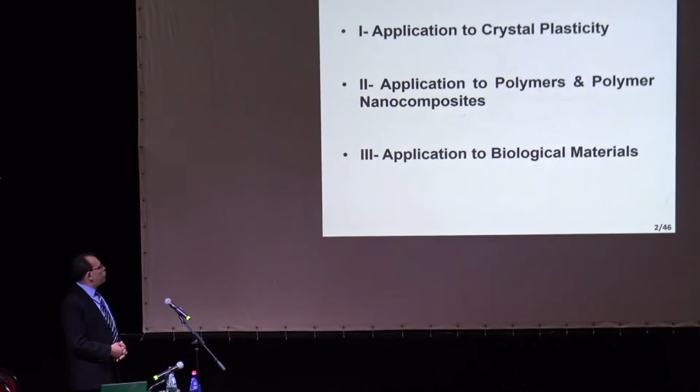As the title says, I will talk about micromechanics of materials as well as multiscale modeling and homogenization, and of course I will focus on microstructural effects, existing microstructure and the evolution of the microstructure, and how that affects the properties. The applications I will focus on today: one is on crystal plasticity, the second is application to polymers and polymer nanocomposites, and the last one, but not least, the application to biological materials in terms of homogenization and prediction of the effective properties.

So let me start with the crystal plasticity part, and I will go through a very brief introduction. Then I will talk about the viscoplastic formulation of deformation of single crystals, then polycrystal, and how we average to get the macroscopic response, but also to get the evolution of the microstructure. And I will talk about the self-consistent modeling.

I will talk about the self-consistent-like model, which is a more pragmatic way of homogenizing, but it gives us great results too. It is simpler than the self-consistent, but I will show you that we predict nice results from that model. And I will also compare to the classical upper bound and lower bound estimates.

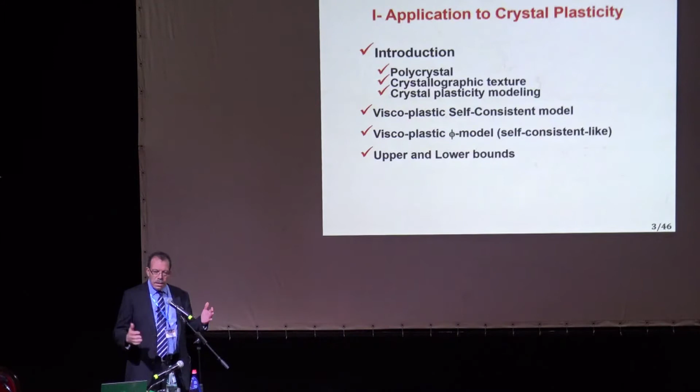So the motivation for crystal plasticity is the fact that when you have deformation processes like in metal forming, you may have initially an isotropic material, but at the end you will have anisotropy that is due to morphology change, the shape of the grains and their orientation, also some behavior due to grain boundaries, but mainly what I will focus on is the crystallographic orientation.

That we call texture, or preferential orientations of crystals. As shown in this schematic here, you may have an initially random distribution of crystallographic orientations, but after a process like rolling or forging, you will have a highly oriented material, with different orientational components that we call texture components or preferential orientation components.

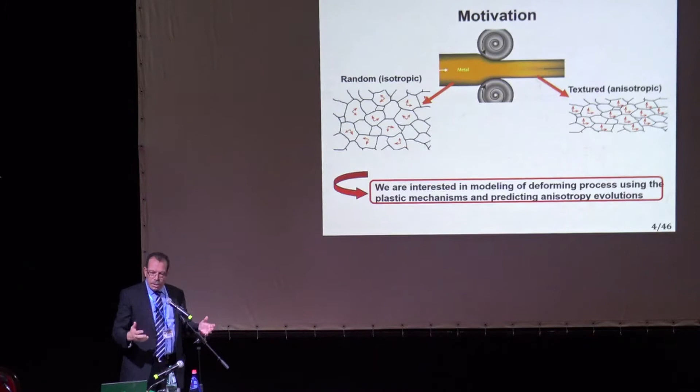So plasticity happens, or occurs, by crystallographic slip on specific crystallographic planes and crystallographic directions depending on the crystalline structure that you have. It may happen also by twinning. These are the main microscopic mechanisms that we have to model and account for, and then take this modeling to the macroscopic level.

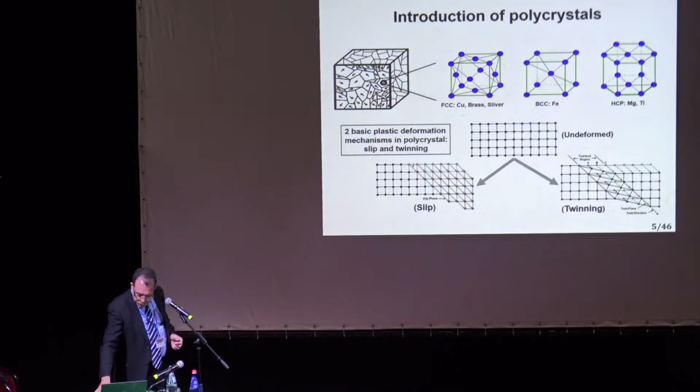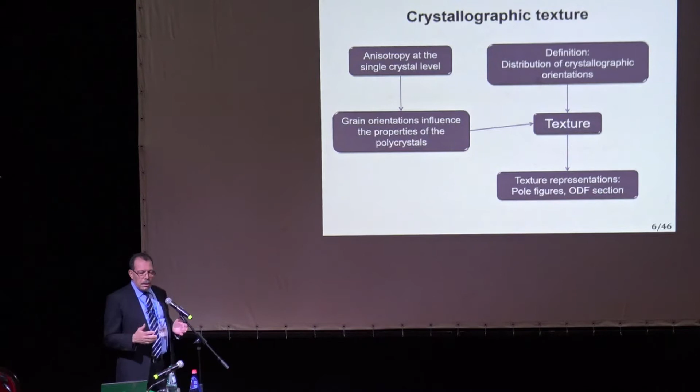Now, when we deal with microstructural evolution, and here is texture or crystallographic orientation, we need to find a way to represent these textures, or this anisotropy. So one of the representations is through the ODF, the orientation distribution function, in which you plot the Euler angles, the three Euler angles, and each crystal fits within a point.

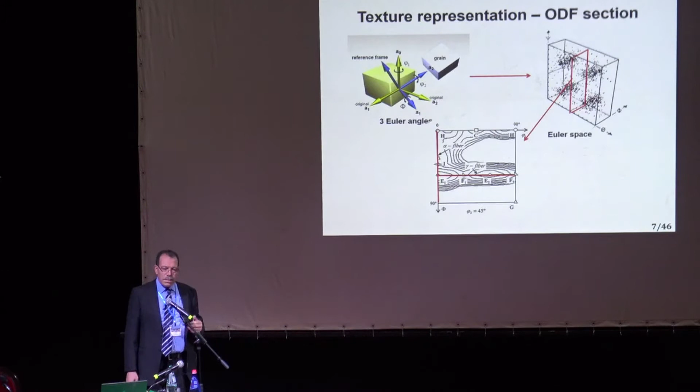But this is a 3D representation, which is difficult to read. However, what we could do is have a 2D slice and cut at a given angle. For example, if we take phi constant, we slice and then plot it in 2D. However, it's not easy to read except for people who know well crystallography or metallurgy.

But the easier way, or one of the easiest ways, is just to use the pole figures. Either direct pole figures, where you take a crystal, plot the normal for a given crystallographic plane, and then project it onto the south pole, and where it intercepts the circle—the intersection with the plane that cuts the sphere into a half—that gives you a point.

If you see on top here, if I have a certain number of crystals, and for example an FCC metal, I plot the 111 planes and the normals to those planes, and if I see something like this in the pole figure, that means I have a random distribution. Here, the macroscopic axes are 1, 2, and 3.

So I know exactly where the crystal sits with respect to macroscopic axis. This is a direct pole figure, and this is a textured material.

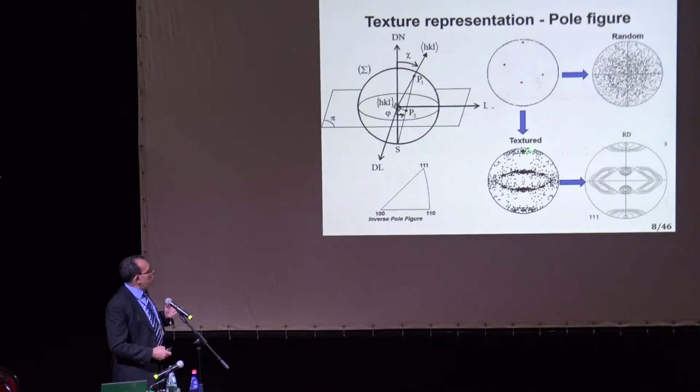This is a rolling texture. As you can see, this is random, this is rolling—you can see concentration of orientations in specific areas. That means we have preferential orientations. For example, this is the rolling direction, this is the transverse direction, and the normal direction is in the center.

So we can say that if this is the 111 pole figure, then the 111 normal planes will have some of them concentrated around the rolling direction, and some in these areas here. So I'm not going into details of this.

The other way of representing is if you have uniaxial loading, like compression or tension, we use what we call inverse pole figure. In fact, we sit in the crystal axis and we see how the macro axes rotate.

So you plot the 100, for FCC metals or FCC materials in general, 110 and 111, and then if you do a tensile test, you may have dots here, and each dot will represent where the tensile axis sits with respect to these three directions.

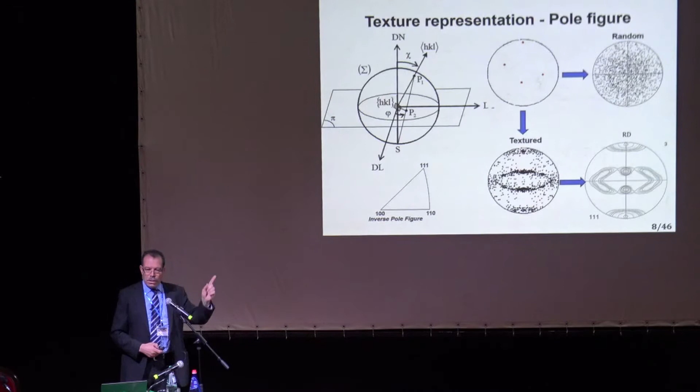Now, I'll start with the modeling of the single crystal, and we are dealing here with large plastic deformation for metal forming. So we go to 100% or more deformation, and we are using large deformation theory.

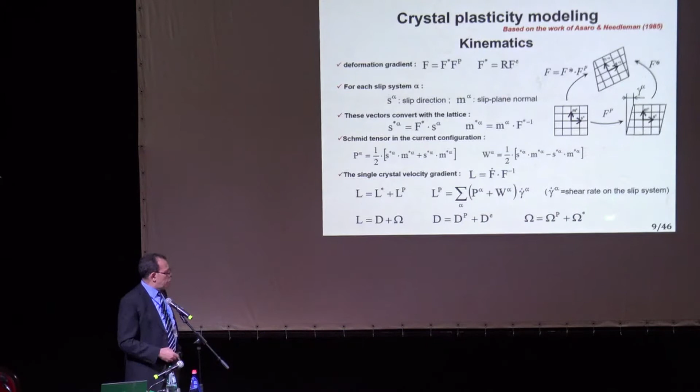So in fact, we don't have Fe—elastic is F star, which includes the elasticity plus the rotation of the lattice. And then from that, of course, this is the classical decomposition to get the velocity gradient, and get the strain rate from the velocity gradient with symmetric part, and get the spin, which is the rotation rate. And then the spin can be decomposed into the plastic spin and the lattice spin.

Now, with this kinematics for the single crystal behavior, let us look at the constitutive law for shearing, or for slip, or crystallographic slip. So we use a power law. We could use a different law like an Arrhenius type relationship, because these are thermally activated processes, but power law works very well, and from a numerical point of view it's also easy to implement.

So this is at the single crystal level. In FCC we have 12 slip systems. So the contribution from each of them would be this gamma dot, which is the rate of shearing. The sum of these weighted by the P alpha, which is the Schmid factor, the symmetric part of the Schmid factor, which is in fact the cosine directors. So that gives you your plastic strain rate tensor.

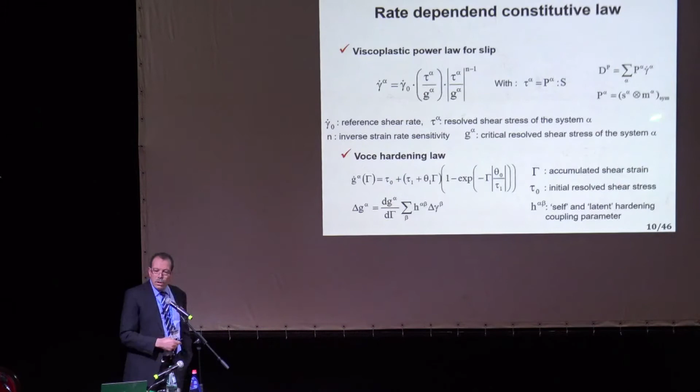And in fact, in this law here, the shear rate is related to the shear stress on the given slip system alpha, and of course it depends on the resistance to shearing, or the critical resolved shear stress. And this resistance to shearing evolves with deformation—that's what we call strain hardening. So we have to apply a hardening law for the evolution of this resistance.

Now, the single crystal has elastic plastic behavior, so D, the strain rate, is elastic plastic. But since I'm dealing with large plastic deformation, we neglect elasticity—it does not affect at all the microstructure evolution. So we neglect that, D is equal to Dp. And if I use the relationship before, then I end up with a relationship like this: D is MS, M is the compliance tensor, and S is the stress.

Now, I have a constitutive law at the single crystal level. And then we assume that at the macroscopic level for the polycrystal, we assume a similar relationship: M bar is the macroscopic compliance tensor, S bar is macroscopic stress, D bar is macroscopic strain rate. And then we have to make sure that the global conditions apply—the averaging conditions—the macroscopic strain rate matches the average of the local strain rates, and the same thing for the stresses.

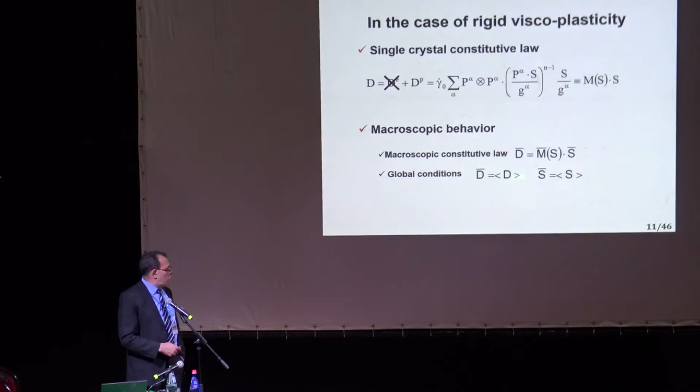Okay, now we are done with the constitutive law for single crystal slip system and for polycrystal. Now we need to look at how the local fields, stress and strain rate of the single crystal, relate to the macroscopic ones.

This relationship is through an interaction law. The stresses could be related to macroscopic stress through an interaction tensor, or the same thing for the strain rate. But how do we do that?

We can make use of the Eshelby tensor, or go through solving the equilibrium equation using integral equations and solving. And then at the end we end up with this relationship here.

This is how D, the local strain rate, relates to macroscopic strain rate. The difference in strain rates is related to the difference in stresses. Sorry, this should be S bar, there is a mistake here. And this R here is what we call the interaction tensor.

This R, in the work I have done with Alain Molinari and Gilles Canova, we found that this R is N, which is the power coefficient, the inverse of the rate sensitivity of the material.

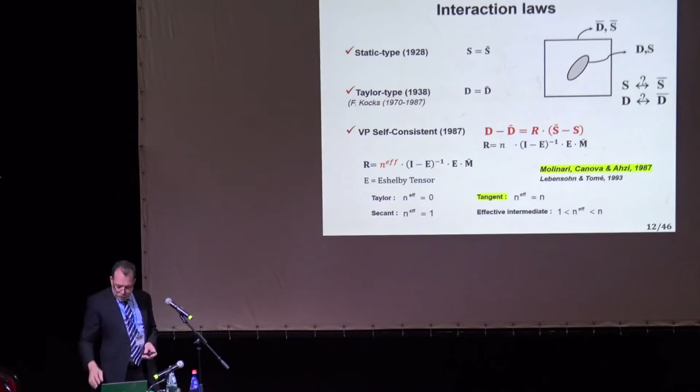So we thought of developing a different self-consistent model, but without having to call for the use of the Eshelby tensor. One motivation, besides not using the Eshelby tensor, is that we noticed that for texture evolution, when we use self-consistent, we get results, but that's the only result you get.

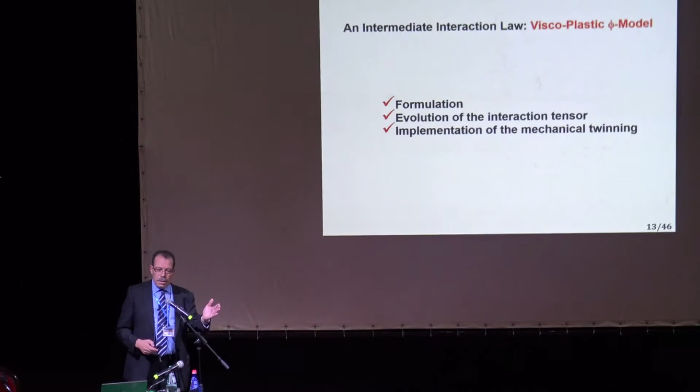You don't get results between the upper bound and lower bound. The upper bound gives different results, slightly different, and the lower bound gives also different results, depending on the materials. We noticed that for FCC materials, it depends on the specific FCC material - you may get results close to the upper bound solution or close to the lower bound solution.

This is an example of brass and copper, or brass and aluminum. Even though they are all FCC, if you take aluminum and look at the compression texture versus the compression texture of brass, it's completely different.

Even though we have this strong component similar, the distribution around it is not the same. If you look at the same for rolling, taking copper and brass, you see the texture components are slightly deviated from each other. What is the reason? They are all FCC, they have the same slip systems.

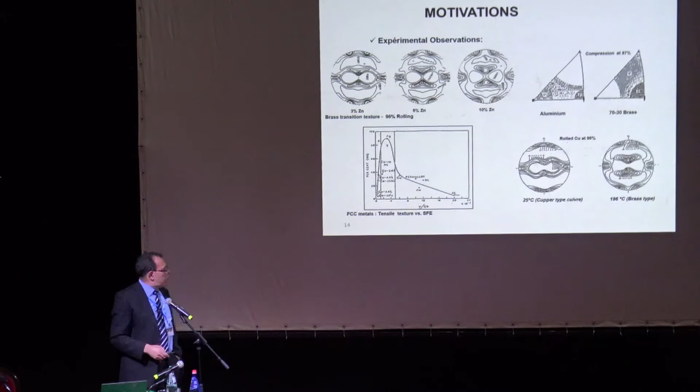So there is some old work that has been done showing the effect of stacking fault energy. Stacking fault energy may have something to do with it, which may affect the slip activity and the cross slip within the single crystal. There might be other reasons that I will mention later on.

That's why we decided to look for a different way of developing an interaction law that links the local field to the macroscopic fields. And what we did here, instead of using integral equations, we just looked at the error.

If you use upper bound, then you have a huge error in the stresses. If you use lower bound, then you have a huge error in the local strain rates or strains. So we took an error in strain or strain rates, an error in these quadratics, and then we combined them with this weight function between 0 and 1, the phi, and we call this the phi model.

We minimized, and I used this d tilde and s tilde, as what you naively get if you average your local fields. When I say naively, you may not get the macroscopic stress or macroscopic strain. So we have to go through a normalization procedure to make sure your average conditions are met, and they are related to the macros.

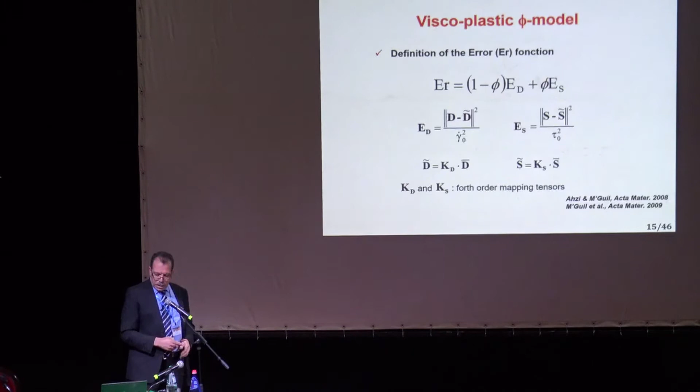These are macroscopic quantities by these tensors that we will evaluate later on. But anyway, we could put D bar and S bar, we just want to make sure that at the end we have the global conditions met as well. So by minimizing the error function, very simple, we end up with this: D minus D bar or D tilde equals this S minus S bar, similar to the viscoplastic self-consistent.

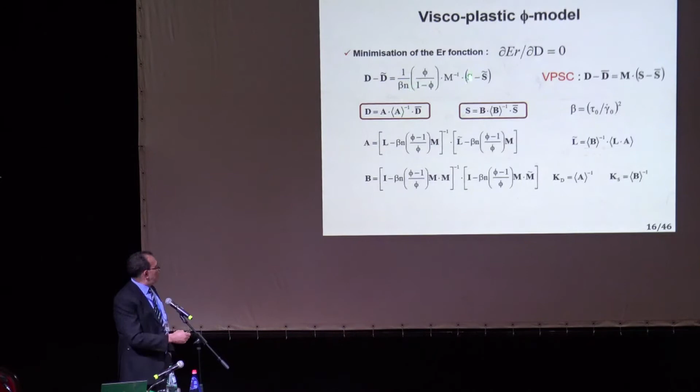Exactly the same type of writing. The only thing is here we have, sorry, it should be R here. I made a mistake, it should be R, and this is a different R, in fact, a different interaction tensor. So I will not go through these details here, there is no need. Let me just go through this: this is how we can write the interaction law for both the self-consistent and for the phi model.

So the difference in stresses are linked to D minus the difference in strain rate through K, which is the inverse of R that I mentioned. Now, in one case, which is the viscoplastic, the K is either N on N effective times this, okay? Or in the phi model, this is what we get. So we have this relationship, and what we should notice is it depends on the compliance.

And the compliance has directionality in it, there are cosine directors in it. Whereas here, the viscoplastic depends on the Eshelby tensor, and Eshelby depends on the effective properties only, not on the local properties. So just to show, when K goes to infinity, we go to the upper bound, when K goes to 0, we get the lower bound, or what we call Sachs and Taylor.

There is one more interaction law that I did not mention in the beginning, which is how to define the spin. In the self-consistent modeling, because we are using integral equations, we are solving for the displacement rate. We take the symmetric part, we get D, and the antisymmetric part, we get the omega, which is the spin. So this is what we get for the viscoplastic self-consistent: the local spin minus the macroscopic spin is related to this tensor here, to the differences between strain rates, local and macro, and this is related also to the Eshelby tensor.

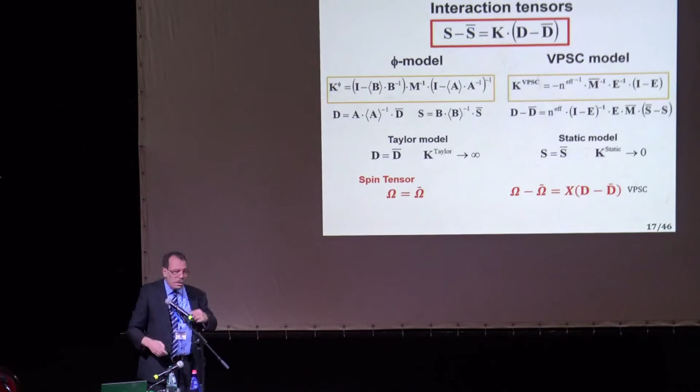Whereas in the upper bound, lower bound, or the phi model, we just have to impose something, it does not come naturally. So we assume that the local spin is equal to the macroscopic spin, which is in fact the case in the self-consistent model too, if you have spherical grains. If you don't have spherical grains, if they're elongated, then this term is non-zero.

Now let me plot these two tensors, the interaction tensors for the phi model and for the self-consistent, taking the power law coefficient to be 5, which corresponds to a strain rate sensitivity of 1/5, and taking phi equal to 0.01, which is close to the upper bound, and phi equal to 0.99, which is close to the lower bound.

What you should notice here is not necessarily how these things evolve, but the values. Look at the values of K: they are of the order of 200, negative 200, for the upper bound. When we get close to the lower bound, they are very, very small. And in between, of course, they are dropping, which means that as phi gets smaller, closer to the upper bound, the K is huge, so huge interactions.

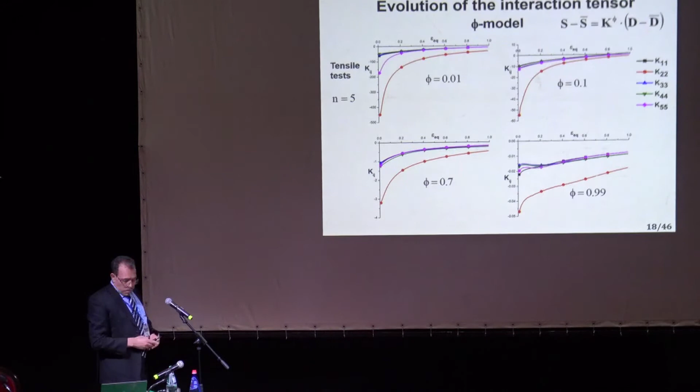If we go to self-consistent, it's the same thing. We use the tangent formulation that we developed in '87, the secant formulation that Lebensohn and Tomé proposed in 1993, but there is an older paper from 1976 where this already exists. John Hutchinson from Harvard developed the secant already at that time, but it was not for large deformation. There was orientation in it, but no texture prediction.

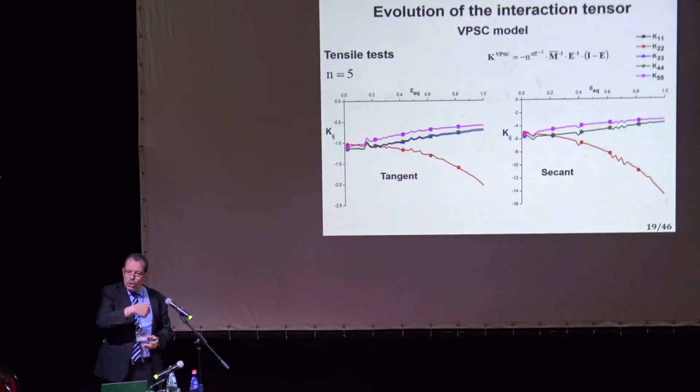What you should notice is the values again. Look at the tangent, the values are of the order of 1. Here the values are 6 times higher, which means that the interactions with the secant modulus are higher. So it's not surprising that I will show you the results with the secant modulus. We got the results close to the upper bound.

The other remark about this interaction tensor: if we take an ellipsoid within an effective medium, and we take grain 1 here, grain 2. If you look at just the ellipsoid, I'm taking on purpose the same orientation of the ellipsoid, and the same effective medium, that means the Eshelby tensor for this grain and for this grain will be exactly the same. However, for the phi model, and if the Eshelby tensor is the same, that means k is the same for both, for the interaction tensor.

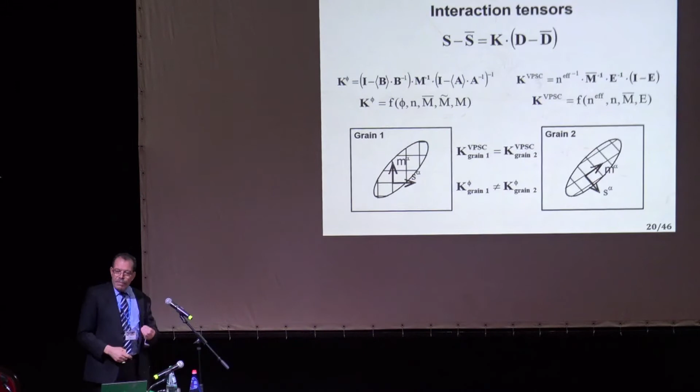But for the phi model, the k or the interaction tensor depends not on Eshelby, it depends on m bar, which is a macroscopic quantity, or m tilde, which is macroscopic, but depends on m, which is the local compliance, and has orientation. So if the orientation of the crystals, taking here S and M, if the orientations are not the same, then even though the ellipsoid has the same orientation and shape, k will still be different. This is new, in fact. So there is also the effect of orientation on the interaction tensor.

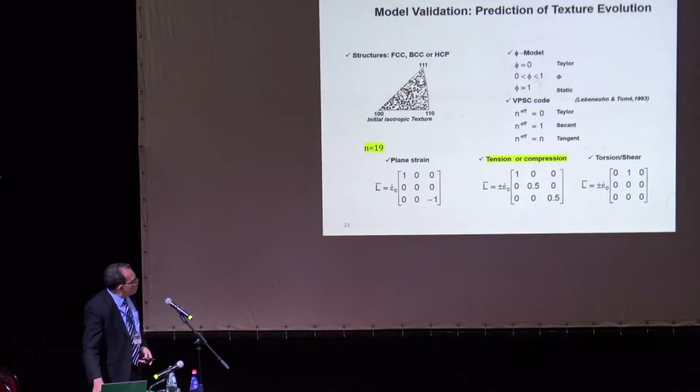Now, validation of this model will take different applications. Here we're taking homogeneous boundary conditions for tension or compression test, uniaxial tension and compression. I will not show the others for plane strain, torsion, or shear. So if we take this, this is the inverse pole figure for compression.

If I go down here, this is n effective equal n, this is the tangent formulation. And we get this texture component at 100% strain. We can say that all the 110, this is an FCC metal, 110 are parallel to the compression direction. This is the texture component we get, and we get exactly the same thing if we use phi equal 0.2, an intermediate phi, not too small, not too close to the upper bound.

If we take a very small phi, 0.05, which is close to the upper bound, you see the texture, we got one fiber but with some deviation. There is some deviation with respect to the exact 110. And if we take the secant modulus and the self-consistent, well, you get exactly the same result. That's why in 1987, we chose to go with the tangent modulus rather than the secant modulus.

Now, the same thing if we do tension. This is the tangent formulation, and we got a strong component 111, a strong component 100. So we have these two important components, and we have some other grains in between.

And if we take a phi equal 0.5, we get similar results. But if we get the secant modulus, and compare it to a small phi, which is close to the upper bound, we get exactly 2 components, but we don't get this distribution in between. But this is not a big difference, it all depends how much concentration we have here. Usually the concentration of 111 and 100 is the strongest. So we cannot say much, but the compression tells much better than the tension in this case, or at least it gives us more details about the prediction in texture.

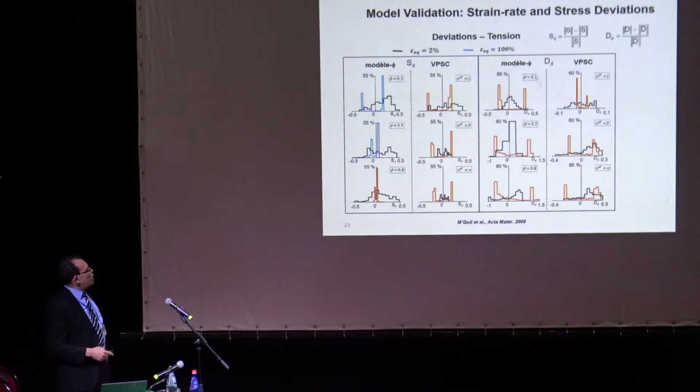And again, we can compare here the tangent modulus versus the secant modulus versus different phi and so on.

Another thing is the stress-strain curve. I did not start with the stress-strain curve because in these models, the stress-strain curve does not tell us much, because you can use the hardening law in any way you want, put parameters there, and fit whatever you want. That's why I left it to the end. But we keep now the same hardening parameters for all models, for different phi, and for upper bound, lower bound with tangent or so. And this is what we get: this is the lower bound, this is the upper bound, and this is for different phi. This is the stress normalized, the equivalent strain, and so it makes sense. This is logical to obtain. There is no surprise, and this shape here is dictated by the hardening law that we have imposed on the shear rates or the critical resolved shear stresses of different slip systems.

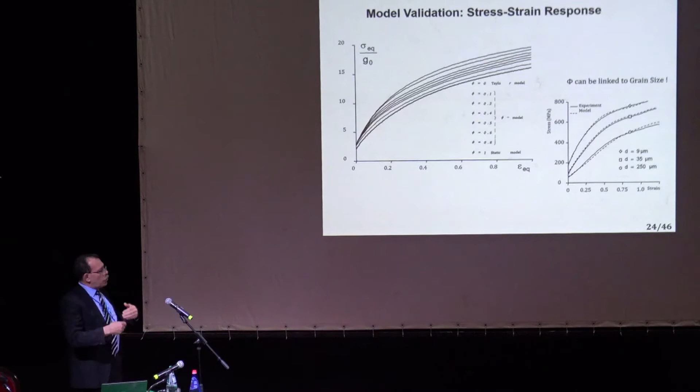Now, one thing we did also is we took a steel and tried to fit the stress-strain curve, but the steel with different grain sizes. So for these 3 different grain sizes, we chose different phis - I forgot to put the phis here. So the story here is to tell you that phi could be linked to stacking fault energy, that I mentioned in the beginning of the material, but could also be linked to grain size. So we can maybe link it to the Hall-Petch effect and so on, but we did not go that far. We are hoping to get some metallurgists to help us link this phi to these microstructural features, could be grain size, stacking fault energy, and so on.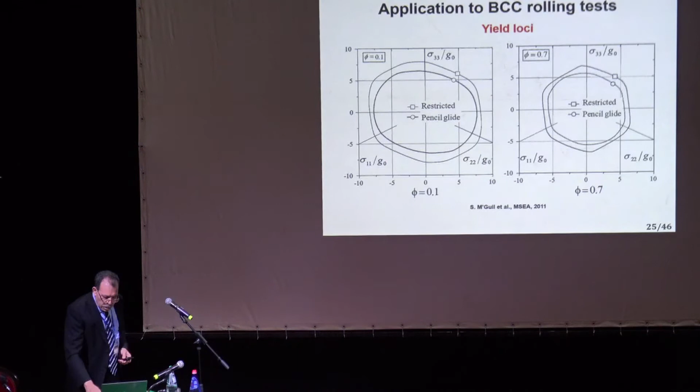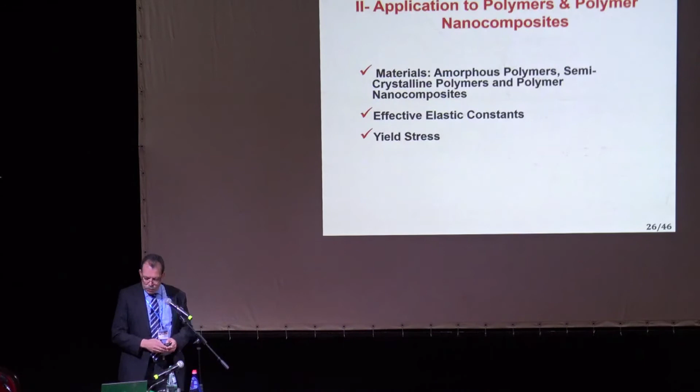Now, I go to the next application, and that's polymers and polymer nanocomposites. So I will consider the amorphous and semi-crystalline polymers, but also polymers reinforced by some nanoparticles. I will talk about first the elastic constants - this is linear homogenization - and then I will talk about the yield stress, and talk about a model that we developed for the yield stress of different polymers, which we developed in collaboration with Yves.

Now, if we start with the just elastic properties of semi-crystalline polymers, you have a crystalline phase, you have an amorphous phase, and it depends on the crystallinity. For polyethylene, for example, if it's low density polyethylene, you have 30–40% crystallinity. If you go to high density polyethylene, you can go to 70–75% crystallinity and so on.

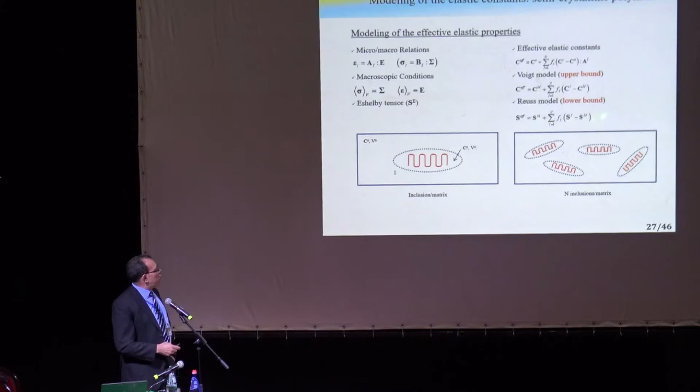So if you take the upper bound or lower bound, this is just averaging, if you want to calculate the effective stiffness, it's just the sum of all stiffnesses. And here the same thing. But now what is the inclusion to consider? So we can think of a double inclusion where we have the crystal surrounded by an amorphous.

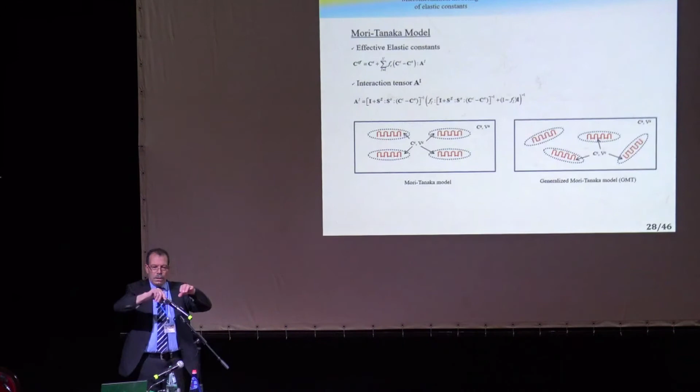There is a paper by Hori and Nemat-Nasser that explains well that model we can apply. We can also use the Mori-Tanaka model. This is the classical Mori-Tanaka where all the inclusions are parallel, but here the inclusions are ellipsoids, very elongated, and they are not in the same direction, so they are all oriented in different directions. That's why we need to use the generalized Mori-Tanaka, which was developed in '87 by Benveniste, I think.

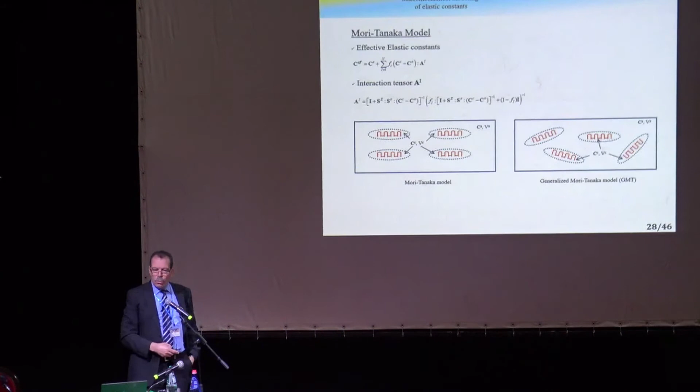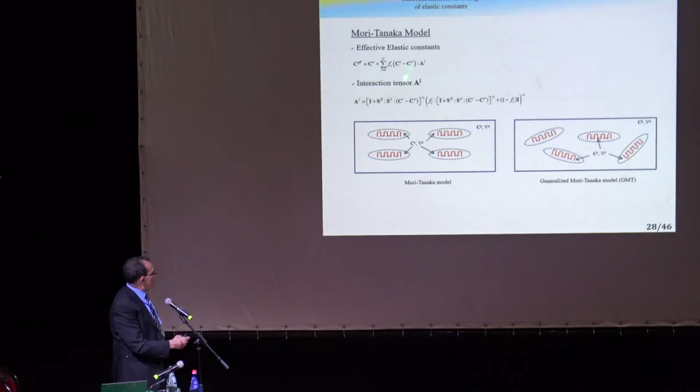So this is the Mori-Tanaka where the effective stiffness, this is the stiffness of the matrix, of the reference medium, times this plus this term here, and this interaction tensor is given by this relationship, which depends on the Hill tensor.

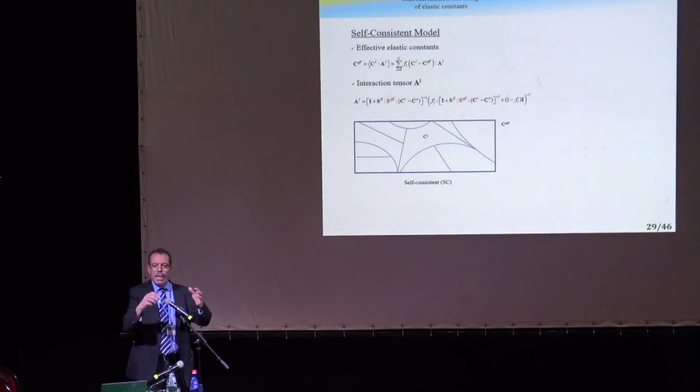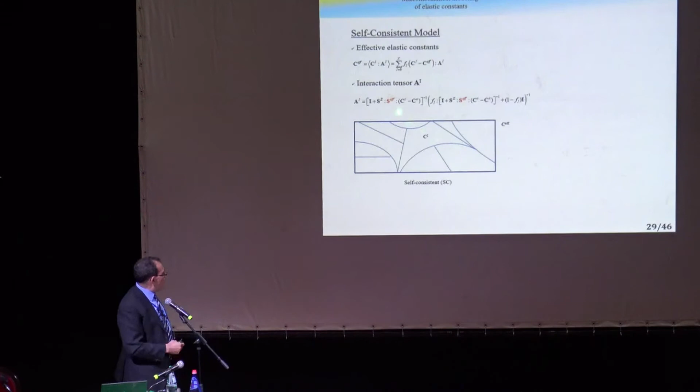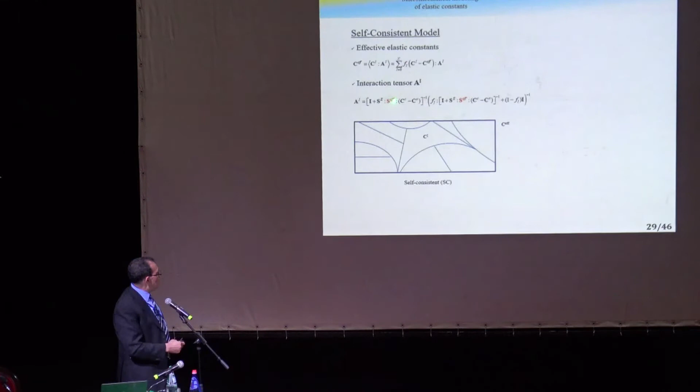We can also use a self-consistent approach. If you use a self-consistent model, we use a double inclusion model, and we make sure that the volume fractions in the double inclusion match somehow some kind of a polycrystal, but a polycrystal made of two-phase inclusions. In this case, the reference medium is no longer the matrix, like in Mori-Tanaka, but it's the effective medium. So this is the effective elastic stiffness, given by this relationship, but the interaction tensor now depends on the Hill tensor and depends on the effective stiffness or compliance tensor.

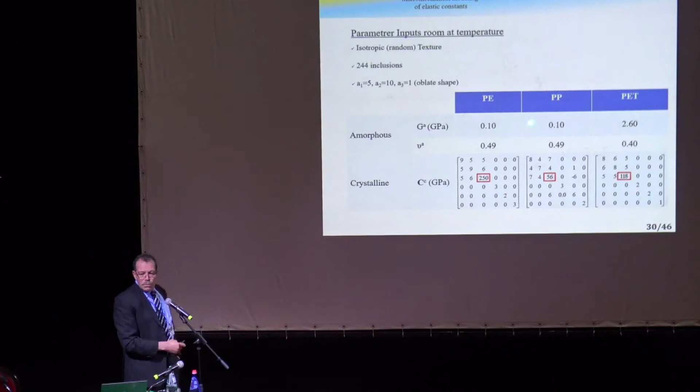And if you look at the amorphous, the shear modulus of amorphous is very, very low compared to this. So we have a high local anisotropy. And if you have oriented polyethylene, certainly you will have high anisotropy of your macroscopic material. If it's random, then you will get an isotropic answer, but still with this local anisotropy, or big contrast as we call it, you cannot rely on upper bound and lower bound. Why? Because there will be a huge difference between the two. When the contrast is high, you have to look for intermediate modeling.

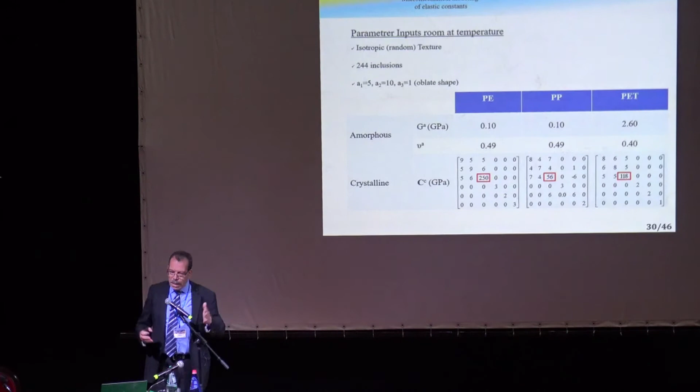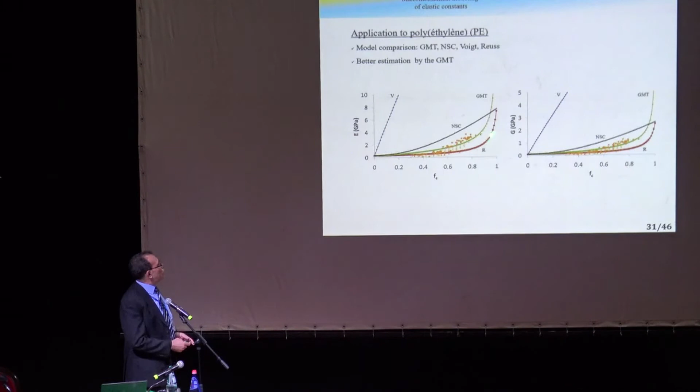And we are looking now at Mori-Tanaka and self-consistency to see what they will give us. This is the comparison of the upper bound, you see a mountain of difference between upper bound and lower bound. And this is the Mori-Tanaka, and this is the self-consistent based on this double inclusion modeling. And this is some experimental work. It looks like the generalized Mori-Tanaka gives us some nice results in this case.

However, the same thing for, this first one was polyethylene, and this one for polypropylene. Same trend somehow, and we didn't have many experimental results to compare to, but we had only these 2 points.

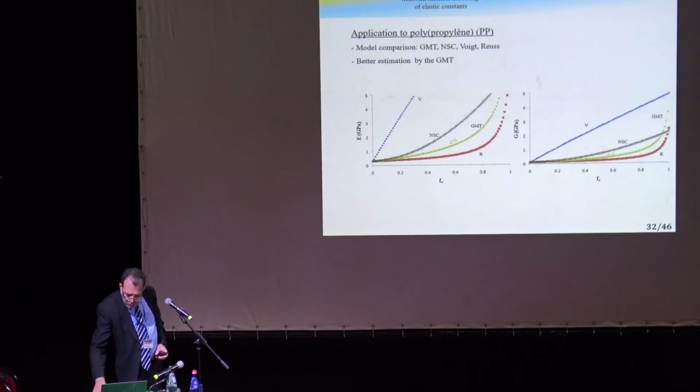But in 1995 and later in 2007, I developed this two-phase inclusion model, which is like a lamella but with two phases, with a planar interface, and it just imposes the planar interface conditions, the jump conditions at this interface. I used it as my inclusion, and I developed a composite upper bound based on this inclusion, a composite lower bound, and also the classical upper bound will be here, the classical lower bound will be here.

All right, so then based on this inclusion, a self-consistent approach. And this is the results we got, very nice results actually with this simple model. There is a paper here that explains all the details, in the International Journal of Materials and Structures in 2007. This is the shear modulus, this is the Young's modulus if you want, and we compared to experimental results that we took from the literature.

By the way, this model did not come just like that. I developed it in the beginning of the 90s and in the late 80s to simulate large viscoplastic deformation of semicrystalline polymers.

And we predicted also texture and so on. In semicrystalline polymers, you have the texture of the crystal due to the crystallographic orientation. You have a texture due to molecular orientation in the amorphous phase, but you have another texture which is morphology, which is the orientation of these crystals. There's also a couple of papers from 1993, I think, with David Parks and Ali Argon from MIT that we published on this in a journal, I think Polymer.

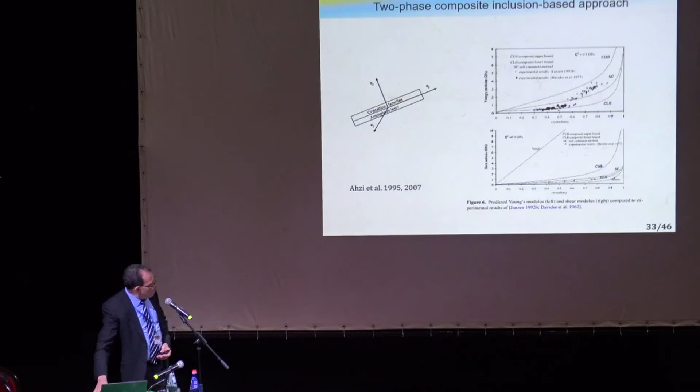Now, I move to the nanocomposites. We did some work in Strasbourg with a couple of students on polymers reinforced with nanoclay. The nanoclay comes in particles like this. When you mix with polymers, what happens depends on the mixing conditions and so on. You may get nothing happens - you still have this microcomposite or microfillers - or you get intercalation, okay.

And this is now much better, so we go to nano somehow. But the best morphology or microstructure is if you get exfoliation, full exfoliation. And that's when you get the best out of this reinforcement in terms of mechanical properties, okay. And in fact, when you see this microstructure, it's similar to semicrystalline polymers, if you take this as a crystal.

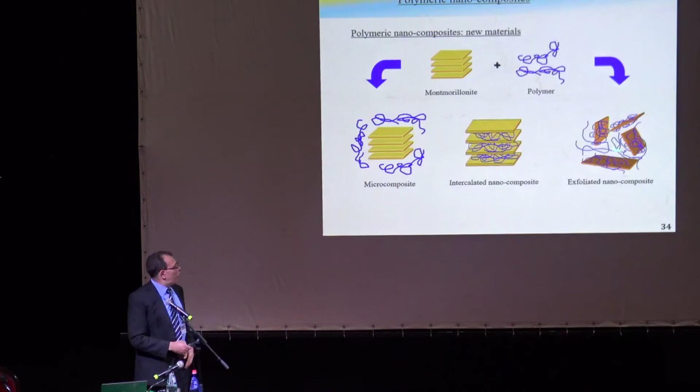Now, for this we are interested not in the elastic properties - we did the elastic properties, but I will show you another model - we looked at the yield stress, the prediction of the yield stress. We were interested in a model. There are so many models that exist. One of them is called the Eyring model, and many others. But the problem was they were all valid within a range of strain rate and a range of temperatures, not unified. So we were looking for a unified model.

That's what we developed - what we call here the cooperative model. We found some old work by these two authors, and we reformulated what they had done, taking the Eyring model. The Eyring model has no n here - this term is 1. We introduced this n here, which is linked to the number of segments in the polymer that are cooperatively in motion during plasticity. And then we introduced an internal stress as well, that pre-exists in the material.

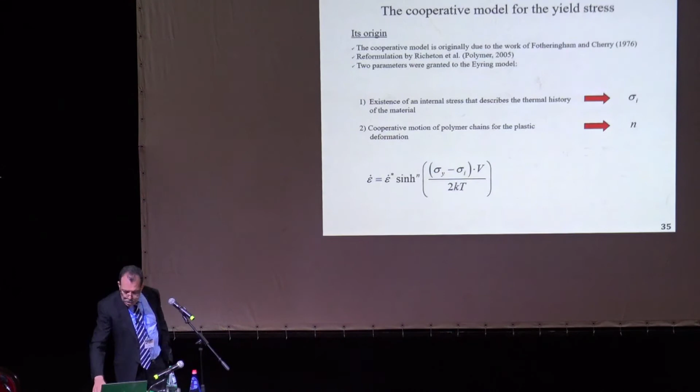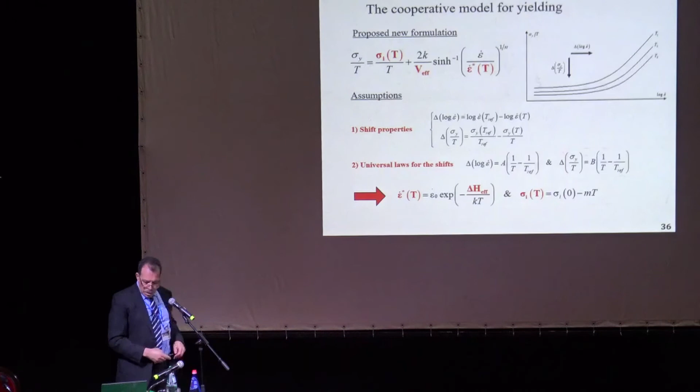Now, by doing that, this is what we get: the yield stress normalized to temperature is the internal stress plus this term here, which depends on the activation volume and depends on this characteristic strain rate. The characteristic strain rate - by using shifts, in fact, what happens is the yield will shift if you change temperature, and will shift if you change the strain rate. So we use these shift relationships here, and we were able to calculate the characteristic strain rate and link it to the activation energy, and then calculate exactly how this internal stress will evolve with temperature. So it's a sigma 0 minus mT, and we set it to 0 when we reach the glass transition.

All right, now this is the final relationship. If your matrix polymer is all amorphous, well, this is V and this is delta H. But if it's two-phase - it could be semi-crystalline, or it could be amorphous plus nanoclay - and if you assume the nanoclay deforms plastically like the crystals of the polymers, then we have to homogenize to calculate the effective activation energy, the effective activation volume. In this one-dimensional case we don't have to go through complex methods - we can use a simple averaging, upper bound, lower bound. Here we use something in between - that's the Takayanagi model.

And by this we used it for semi-crystalline polymers. This is an application to polypropylene. As you can see, we are predicting very nicely the yield stress as a function of strain rate, all ranges of strain rate from quasi-static to dynamic, okay, and several ranges of temperatures.

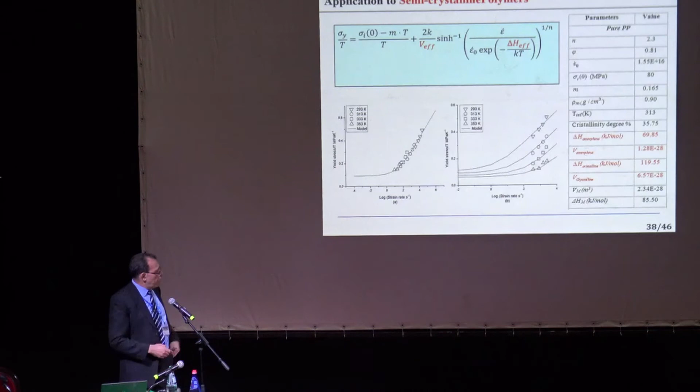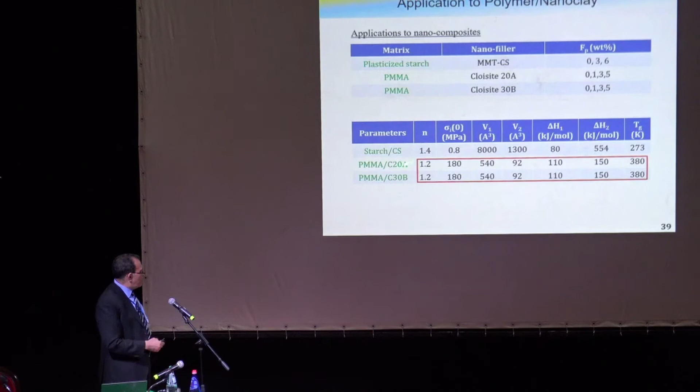And we also applied it to polymer nanoclay. We have two different nanoclays, C20A and C30B. These are two different types, and we were able to predict the yield as a function of strain rate. Of course, here we didn't have dynamic loading. We compared to quasi-static loading experiments, and as you can see, the fit is very nice.

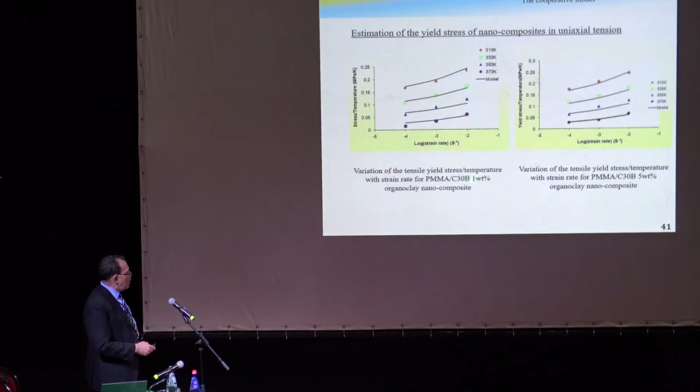This is for 1% of these nanoclays and for 5% of these nanoclays. The same thing for the second type of nanoclay, 1% and 5%. Also, the fit is very nice compared to, at least within the quasi-static range.

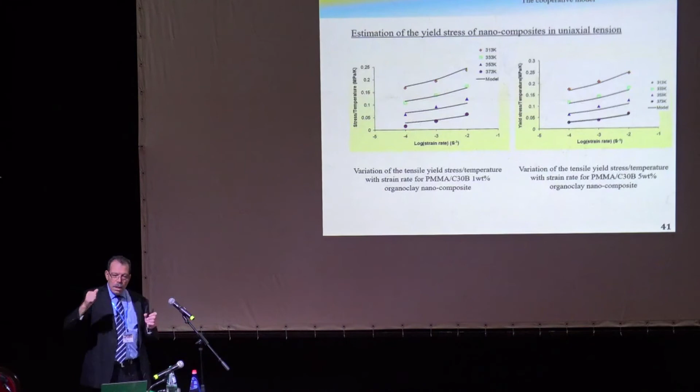Now, what if the filler does not deform plastically? So I'm not going to calculate activation energy. What happens is you just take the yield of the matrix and modify it because of the fillers. And the modification, we took this model from these authors, which tells us that the yield of the composite divided by the yield of the matrix is given by this relation.

This coefficient, as you can see, is known as the Einstein coefficient somehow, but it's multiplied by this term here, which depends on the volume fraction of the fillers and this coefficient B. Coefficient B will tell us about the interaction between the matrix and the fillers.

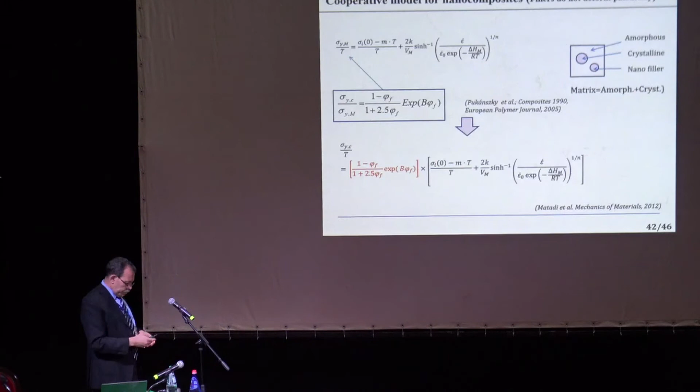If you have an exfoliated microstructure, then B will be very high. And if you don't have exfoliation, for example nothing happens, you have microcomposites, B will be 0.

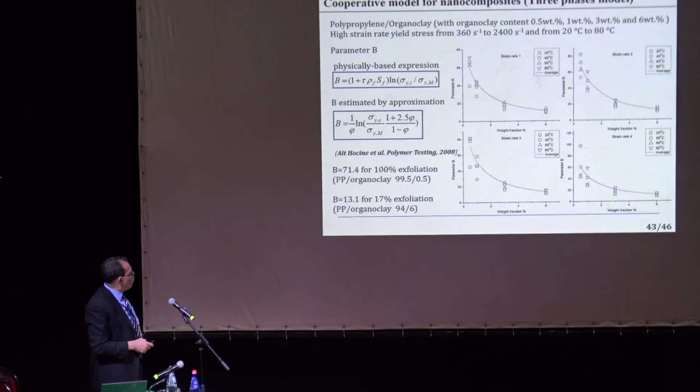So we use this in an inverse way. We did experiments with polypropylene filled with nanoclay, and this is what we get. We're looking into different strain rates, but we just choose one, it doesn't matter which. These are 4 different strain rates, sorry.

So we choose one. As you can see, this is the parameter B that we calculated through this relationship as a function of the weight percent. It is high when the weight percent is very low, which means here we have exfoliation. But if you go to higher loading of the fillers, you don't get everything exfoliated. You have intercalation, but you also have particles that did not intercalate or exfoliate at all.

That means you can use this to estimate the amount of exfoliation. So that's what we did here. For this case, we find B equals 71, which we linked to 100% exfoliation. If we have this other value, we got about 17%. So we can use this relationship to estimate the amount of exfoliation.

Now, for the last part, we looked at some biological material, thanks to Eve who dragged me into these biological materials a few years ago. We worked with a couple of students on these projects, maybe 3 students. But what I will present is just a quick application from one of them, for this arthropod cuticle, which in this example is the lobster.

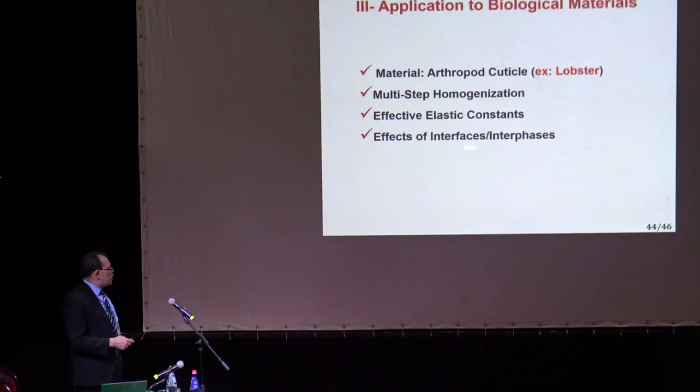We applied this to lobster, and in this case we are using a multi-step homogenization because the microstructure is very complex, which I will show you in the next slide. We are interested in just the elastic constants, and of course what we did is look at the effect of interfaces or interphases.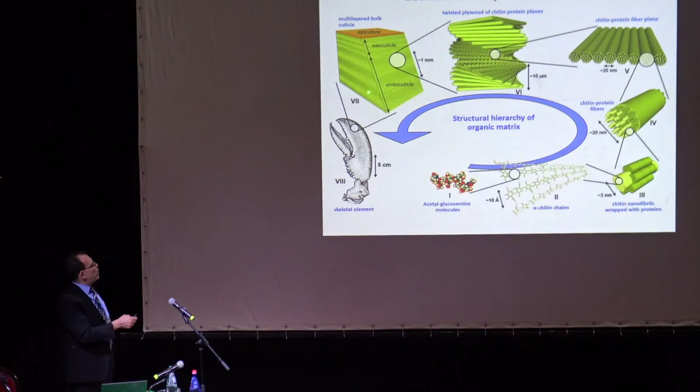So just to show you the multi-step homogenization, first we need the properties at this level of the chitin chains. We used some work by one of our colleagues we collaborate with, Nikolov, from Max Planck. They did experiments there, and we used their experimental work. They use molecular dynamics to get the elastic constants, and then we combine these with the protein matrix to get the properties of the fibers.

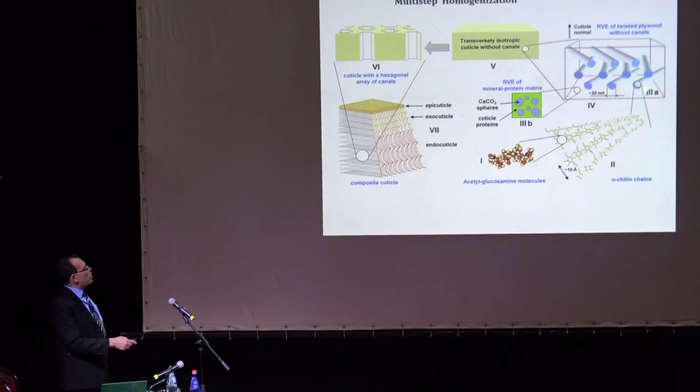We have aligned fibers in a matrix made of proteins, but filled with calcium carbonate spheres. So we have to do homogenization to get the property of the matrix, homogenization to get the property of these composite fibers, then homogenize to get the properties of one ply, and then average over 3 different orientations to get to the next level with other plies.

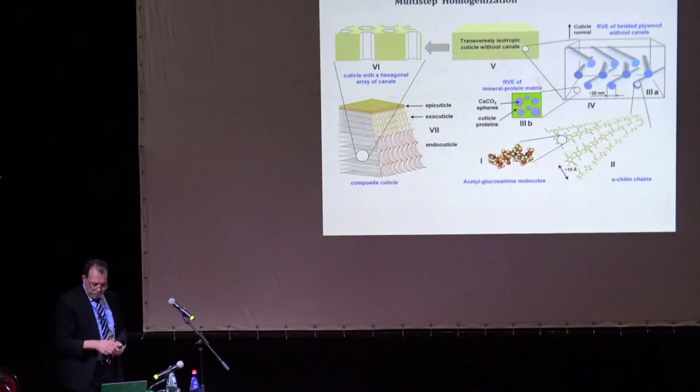So with what Nikolov did first, at these different levels he used Mori-Tanaka at this level, then Mori-Tanaka, then Torquato, Mori-Tanaka again, Voigt and Torquato. This is just to account for porosity. Torquato used a 2-point probability or statistical method, which is very complex—actually very difficult to determine those 2-point statistical properties. But what we decided to do is first just use Mori-Tanaka rather than this.

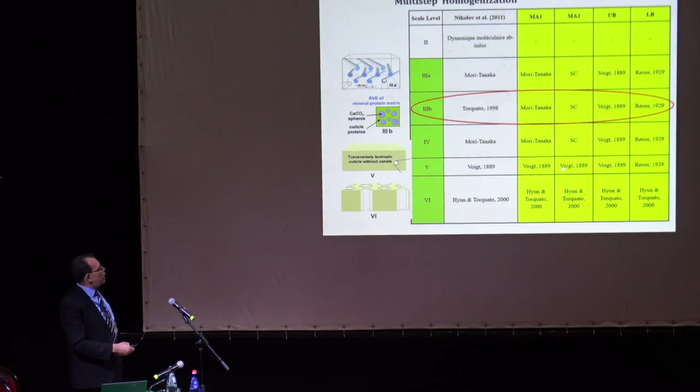The second thing we decided to do is, instead of using Mori-Tanaka, use the self-consistent method everywhere, except at this level here, when we have to average all these plies, we just use the upper bound estimate.

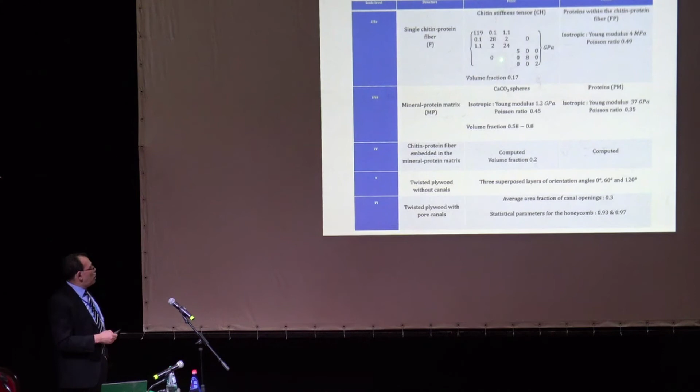Now, just to give you an idea of the properties, you again have a huge contrast in the properties at different levels. This is the elastic stiffness that they obtained from molecular dynamics, and these are the properties of the matrix to get the fibers.

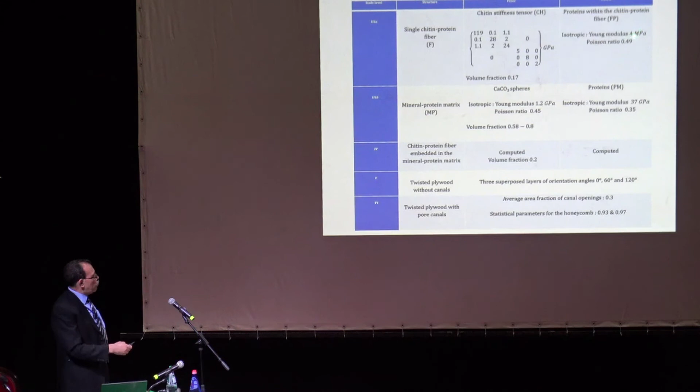Now at the matrix at level 3, we have a matrix with these properties filled by calcium carbonates with these properties, and so on. So we have all the properties here, but the most important thing to retain is we have local anisotropy at the chitin level, and also different matrices at different levels with completely different properties, from 4 megapascals, for example, to 37 gigapascals. So these are huge contrasts.

What we decided to do is see if we can do something at these different levels, level 3 and level 4, and include some interface—instead of having a jump between the properties of the filler and the matrix, we'd have an interface with some intermediate properties. We use the double inclusion model that I mentioned before, which was initially developed by Hori and Nemat-Nasser in 1993.

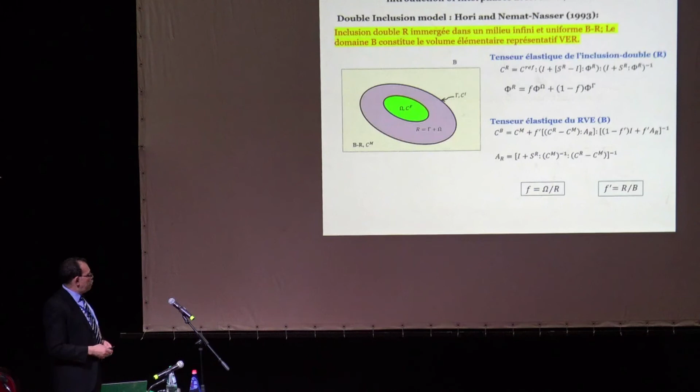These are the relationships, and so on—I'm not going into these details. By doing that at this level and at this level, this is what we did, and also at this level here. However, at this level, the change was not much—actually, the interfaces did not give us much change.

However, we really have to tune these results in terms of the ratio between the properties of the filler or the matrix and the interface, and also the amount or volume fraction of that interface. We have no idea, so we just use tuning somehow.

So by this tuning, we can find a compromise somehow to be closer to the experimental results. So with this, I will conclude.

We developed micromechanical modeling for unified constitutive laws that account for microstructural features of heterogeneous materials. We developed different homogenization techniques for linear as well as nonlinear behavior, accounting for microstructural effects and their evolution, using either Eshelby based or non-Eshelby based homogenization techniques, as well as multi-step homogenization procedures. Different materials have been considered: metals, polymers, polymer nanocomposites, semi-crystalline polymers, biological materials, and so on.

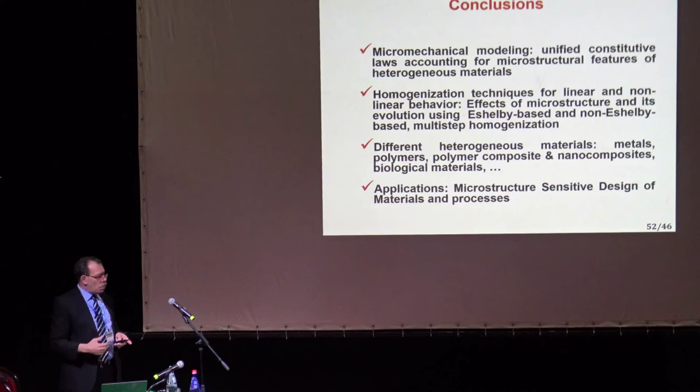I'll show you this. This is, in fact, an ongoing work, we still don't have many results here. This is ongoing work for application to the design of fiber composites built by 3D printing. Here we are using the process called FDM, fused deposition modeling.

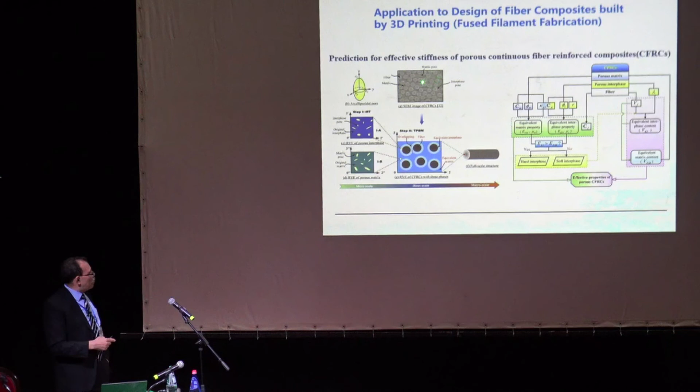Specifically fused filament fabrication, where you have a filament of polymer reinforced by short fibers, but along with it you deposit long fibers. So it's a mixture of short and long fibers, and we are going to look into these multi-step and multi-scale homogenization techniques to predict the properties in terms of the different reinforcement, but also in terms of the porosity that we get into in these materials.

So now, on a final note, I would like to thank many of my collaborators in France, in the US, Portugal, Luxembourg, China, and so on. Special thanks go to Professor Yves Rémond, a great collaborator and a great friend, and we have been collaborating for the last 22 years.

Special thanks go to Professor Francesco dell'Isola. Thank you for inviting me, and I thank you all for listening. And I leave you with this.

Thank you. This is Strasbourg, okay?

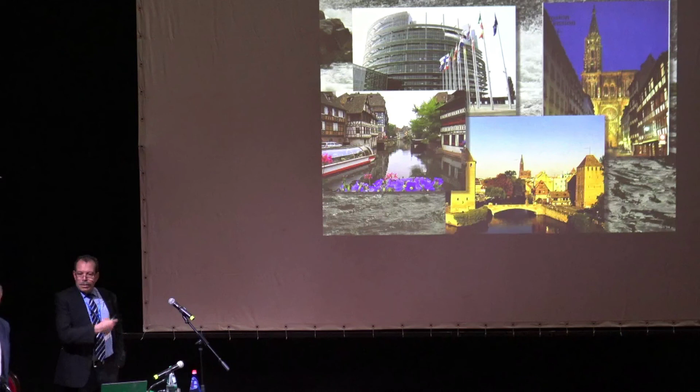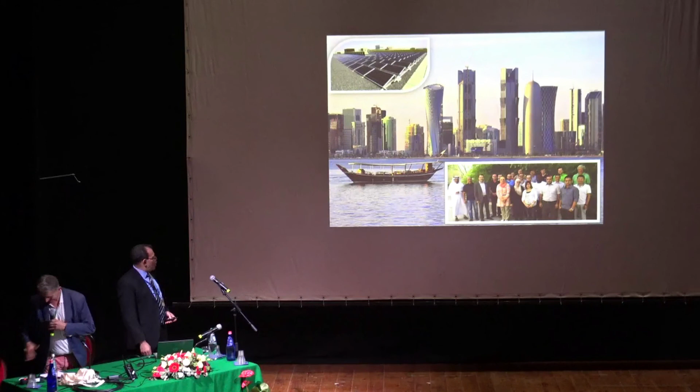Yes, Professor Rémond had mentioned my stay on leave was in Qatar. I think I have maybe a picture of Qatar. But I was working on a different project. This is the team I was working with, and in fact I was interested in photovoltaics. Plus, we were interested in water treatment, so we were looking into membranes, polymer membranes reinforced by nano, how to functionalize them and so on. So it's a completely different research project.

Thank you. Thank you so much also for a new point of view about lobster, when we will eat the next one we'll see Professor Ahzi. So maybe we have one question, and yes, please.

How do you choose the RVE, especially the size of the RVE? Given that the RVE, the representative volume element, has to be infinitesimal relative to the macro scale, and on the other hand, the RVE has to be radically larger than the microconstituents.

Yes, this is a very important question. Of course, for any homogenization, we have to make sure that the RVE is selected correctly. One way is just to select one size and then increase it until the property is not changing anymore. But I agree with you.

There might be some areas in this multi-step process where we have to be extremely careful. There are some length scales that may not allow us to use homogenization because of the limitation of the RVE. But yes, we paid attention to the RVE, made sure that it was large enough for the properties not to be changing much.